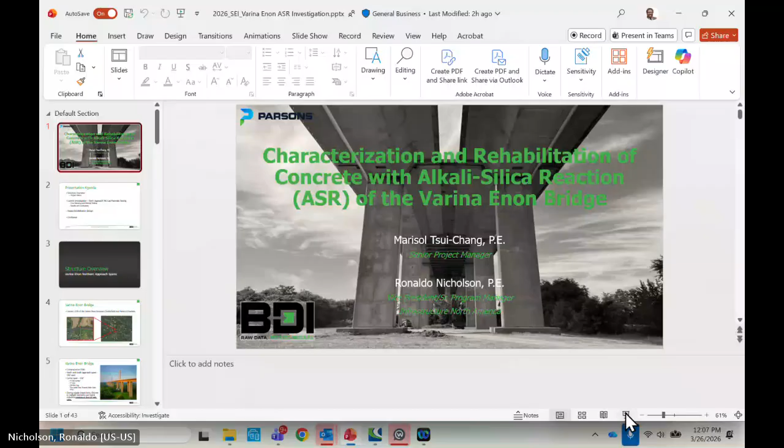Let me get the mic. Okay, I hear you. Now you can hear me. Yes. There we go. All right, I see it. Perfect. All right, floor is yours.

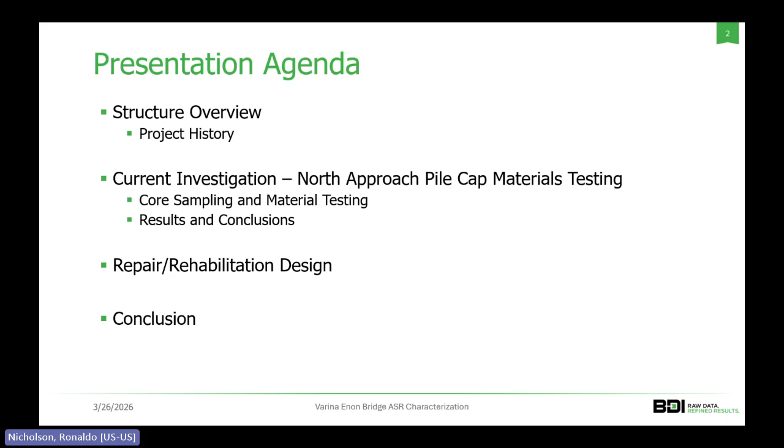Thank you. Well, thanks for the opportunity. Appreciate talking about this project. It's a very interesting, challenging project, and Marisol and I will hope to keep those interests going. We're talking about the Varina Enon Bridge, and our presentation today will focus on 3 areas and then give time for questions from you all and let you know the status update of where we are going forward.

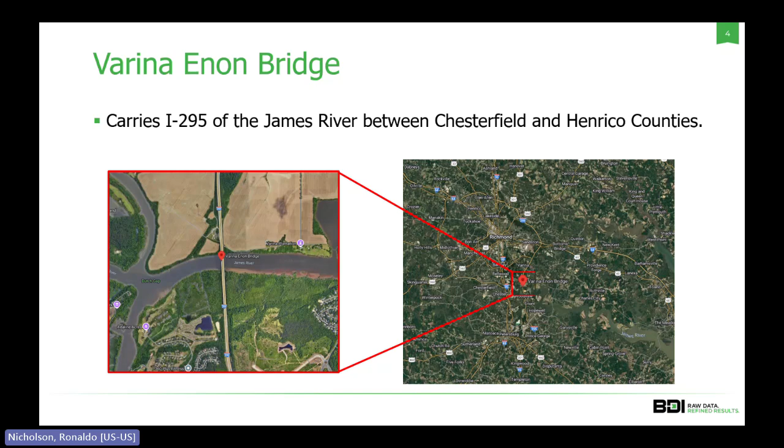Overview of the structure itself. It's Virginia's first and only cable-stayed bridge. It carries I-295 over the James River, right at the borderline of Chesterfield and Henrico County, which is a bypass, a circular of the city of Richmond. Originally completed in the early 1990s. It has a center main span of 630 feet with approach spans of 150 each. Post-tension box girders and piers with a cast-in-place pile cap.

That's where our real problem exists, is in the cast-in-place units of the structure, as they were found to have ASR contamination. Basically, through our regular biannual inspections, we're starting to notice distress in multiple units of the pile caps. And as it continued to deteriorate due to that ASR expansion, concern was then given to its ability to carry the loads. Aesthetically pleasing bridge if you ever been on it, but the problems lie down in both the exposed and buried pile caps, as you'll see as we get further on.

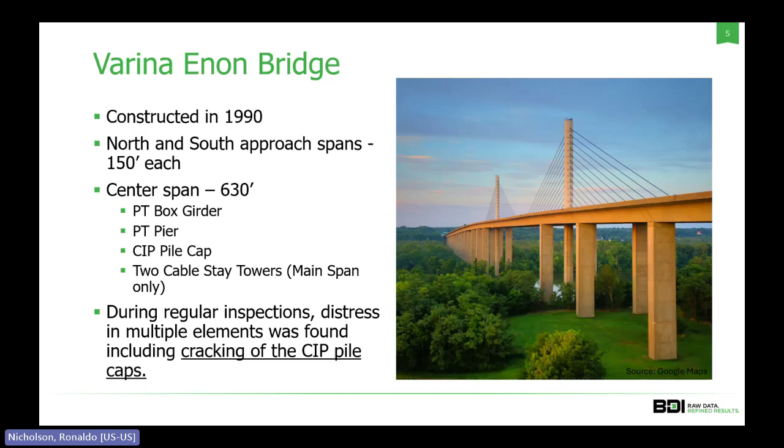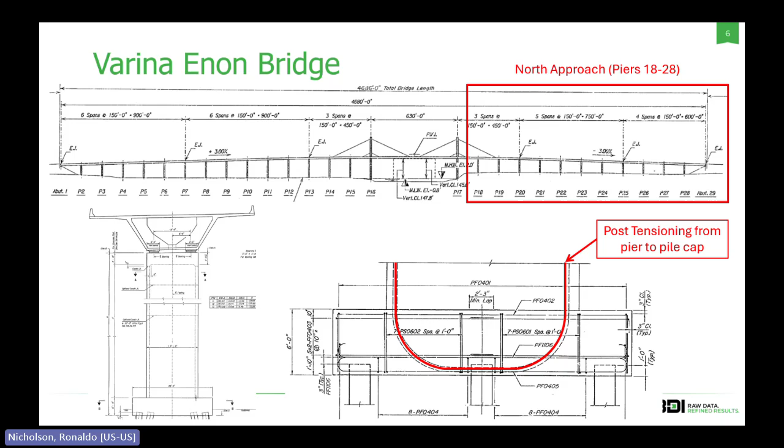Here is the profile and some of the representative piers of the structure. Note again that we had post-tensioning of the pile caps. Basically up over the James River. These are 2 dual bridges with some 27 pairs of piers. This particular presentation focuses on the northern approach, because through inspection, testing, we found out that those were mostly in the severe deteriorated conditions. We came along after a study conducted by WSP. Their study was in the 2018 timeframe. Ours was in latter years of, I'd say the mid years of 2023.

We basically advised VDOT, the owner of the bridge, that the footings were in a state of severe cracking, and the load carrying capacity was at risk. VDOT did an initial study to consider the replacing of the structure versus rehabilitation.

Just to step back, ASR, alkali-silica reaction, is normally a cancer of concrete. There's not a remedy thus far, despite research that has been conducted by the University of Texas at Austin, Federal Highways, and other owner agencies have just determined that mostly when it's there, you replace the concrete, you replace the components, you replace the structural elements that have the reaction. We did not have that benefit or luxury with the Varina Enon Bridge, being that it was the pile caps for the footings. The replacement means we replaced the bridge.

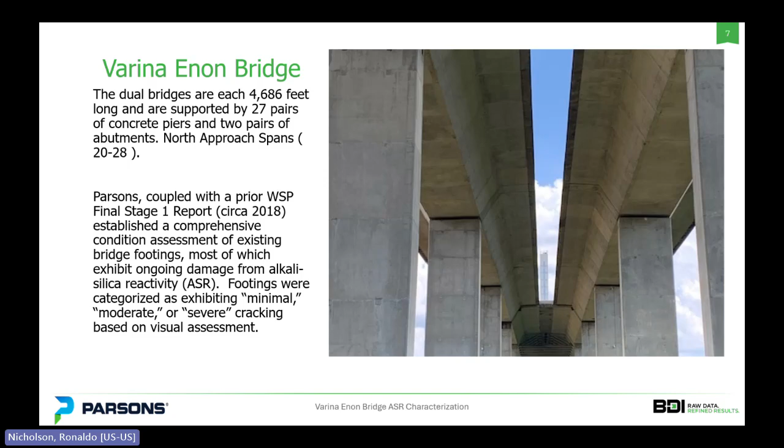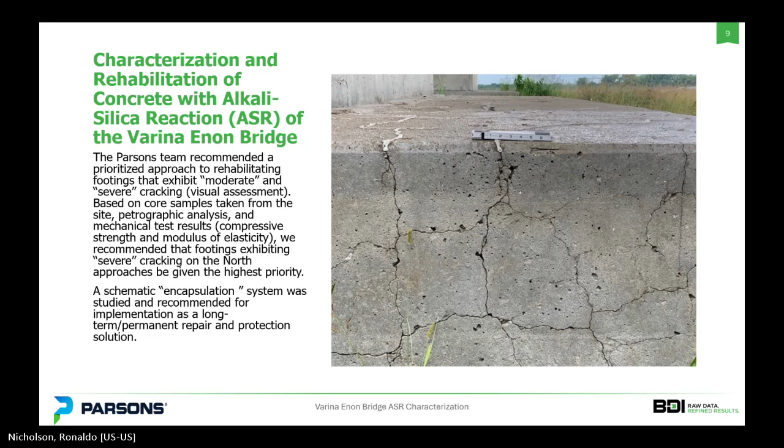Marisol, you want to jump in? Yep. Thank you, Nick. So now we'll go over some of the project history and some initial investigations. So like Nick said, the Parsons team recommended a prioritized approach, first to look at the moderate and severe cracked pile caps based on some of the core samples taken from the initial investigation, some petrography, material testing, that kind of stuff. They did recommend that at least the severely cracked pile caps in the north approach be given the highest priority, or then again, like the goal would be to extend the life by doing some sort of repair. And in this case, the schematic encapsulation system was studied and recommended for the implementation as a long-term solution.

So like Nick mentioned, during regular inspections, extensive map cracking of these pile caps, as you can see in the photo on the right, was observed. From that, some of the limited material testing from WSP and others in previous years included petrographic analysis, chloride testing, compressive, split tensile, modulus of elasticity, and then some residual ASR expansion testing.

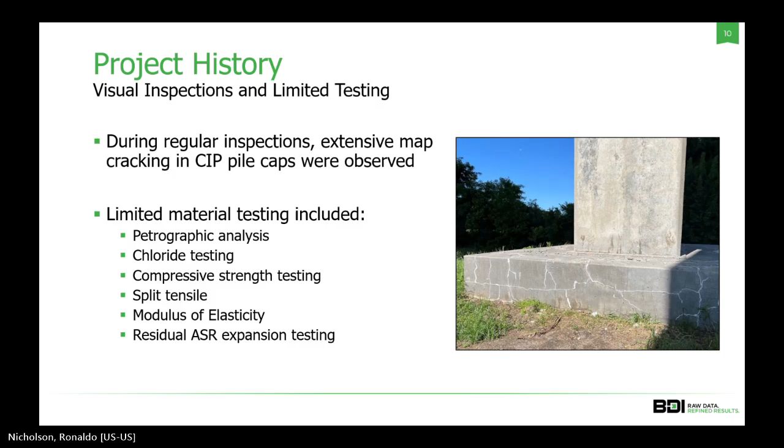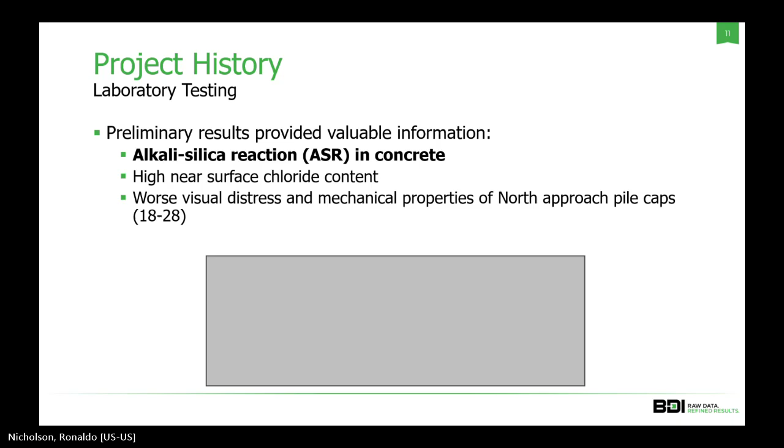Next slide, please. From these results, some of the valuable information obtained was that, in fact, they did have alkali-silica reaction in the concrete. They also had some high near-surface chloride contents, and in general, worse visual distress and mechanical properties of the north approach pile caps, which is why Parsons, in this case, recommended to start over there and perform sort of repair encapsulation. Next slide, please.

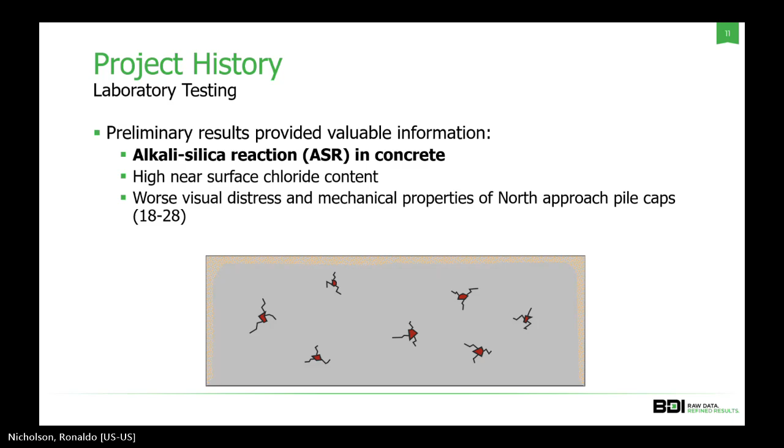So taking a step back, what is ASR? I think Nick started off really well by saying that it is considered the cancer of concrete. ASR in concrete is a chemical reaction between the alkalis in the cement paste and the reactive silica in the aggregates, in combination with moisture, that produces an expansive gel that can cause cracking and deterioration over time.

This expansive gel reaction generally starts within the aggregate and around it, cracking inside the aggregates themselves and then expanding outward. A lot of the time ASR can be manifested as map cracking, like the photo on the left. But if you take a core with pretty severe ASR, you can see cracking in and around the aggregates with a whitish material. That's one way to preliminarily deduce that ASR is occurring.

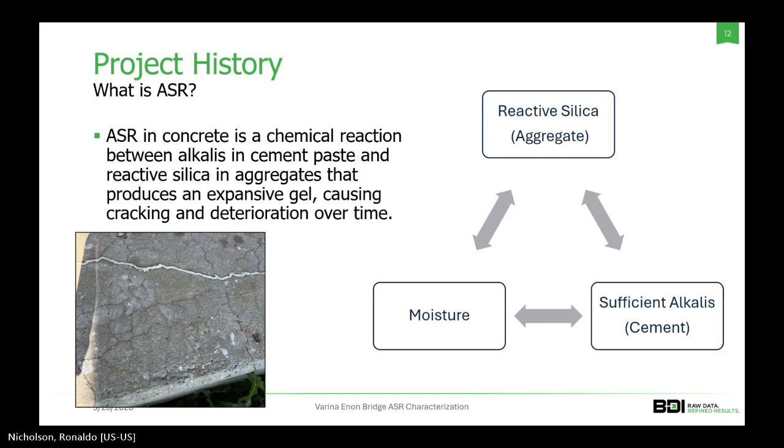But at the same time, you do need petrographic examination to confirm that it is in fact ASR. So from the preliminary investigation, the owner still needed to answer a lot of questions to allow for effective decision making and design of the repairs.

These questions were: why are the north approach piers in worse condition? What's the difference between the north and the south? How has the concrete already been impacted? Where are we in point of time in this cancer? What is the potential future expansion from ASR? What specific piers need to be prioritized? And what other deterioration mechanisms are present?

Because this is an extensive list, we're only really going to prioritize the potential future expansion for ASR for the current investigation, because that was one of the main questions that would inform the repair design. So we'll focus on that next.

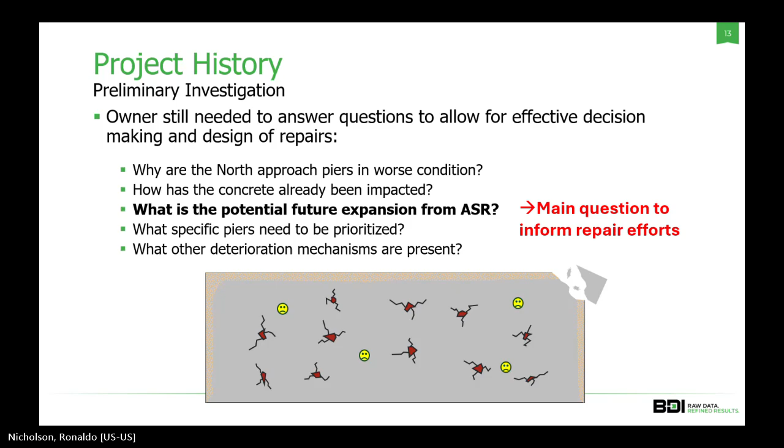Alright, so for the current investigation, for testing and project goals, we wanted to determine key information to confirm design assumptions and inform an effective repair design that Nick will go over after this section. Key information included in-situ mechanical properties, making sure the assumptions on these mechanical properties were correct, and if not, course correct. This included compressive strength, split tensile strength, stiffness damage testing, and modulus of elasticity.

We also wanted to look at the remaining ASR expansion based on advanced models using the damage rate index, ASR expansion testing, and residual alkalis. These advanced models were performed by Dr. Leandro Sanchez from University of Ottawa, who was one of the subject matter experts for the project.

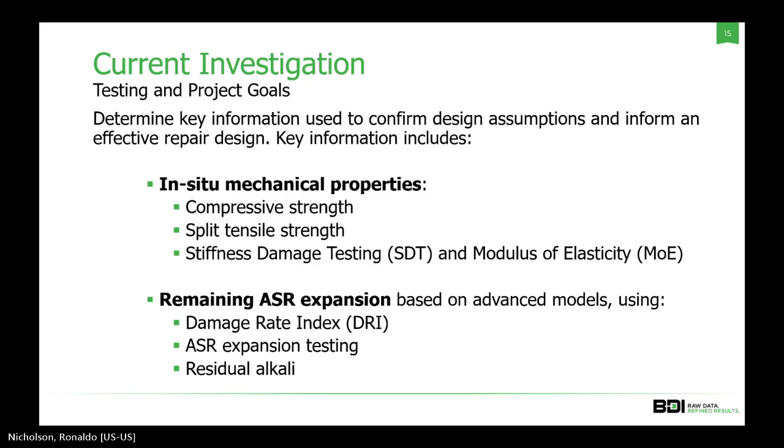So the testing performed - again, we did a lot of testing for this investigation of the north approach. We did non-destructive evaluation, high-resolution imaging, and ultrasonic surface waves. We also did petrographic testing to look for types of aggregates and constituents, hardened air testing, secondary deposit or DEF, and ASR damage rating index, or DRI.

For the mechanical properties, we did compressive strength, split tensile testing with modulus of elasticity. For the ASR testing, we did residual alkali expansion testing and water-soluble alkalis. And for chloride testing, we also did acid-soluble and water-soluble. Again, we're not going to go over all of these because it's a very in-depth investigation - we'll only go over primarily the ones that are bold on the screen.

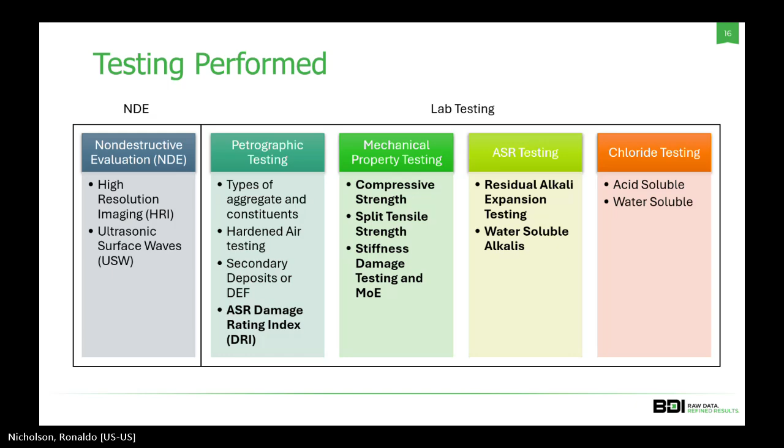So for the concrete sampling and testing, we sampled in accordance with ACI 214.4, and we collected about 92 cores across the entire north approach, where one core could be utilized for multiple tests since these were going to be pretty large cores. We performed about 625 tests total, and we decided on collecting the cores in the most critical concrete sections, for both vertical and horizontal cores. I'll explain a little bit of what that means in the next slide.

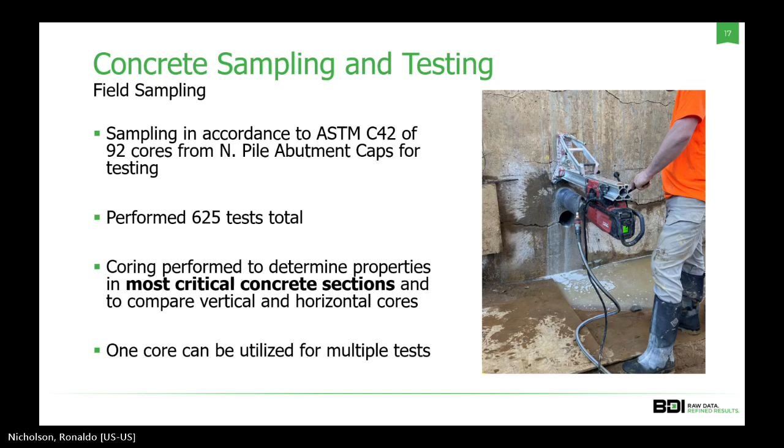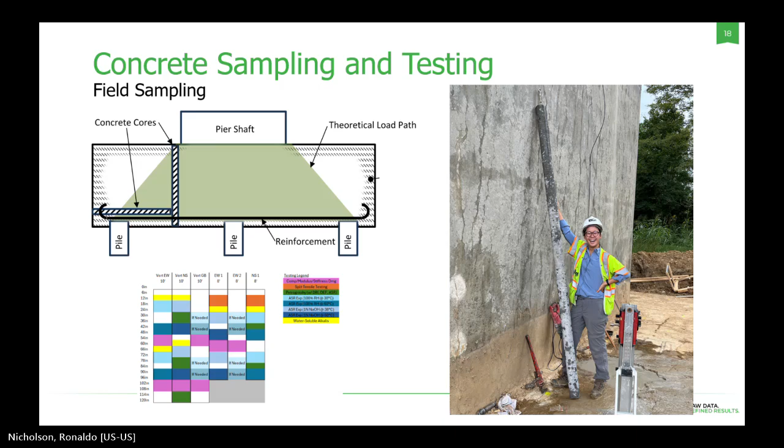For some of the pile caps, since the height of these pile caps were up to 10 feet, some of these cores were pretty long and weighed over 200 pounds. So this was quite an effort to be able to collect these cores. Next slide, please.

So this is the entire lab testing matrix for all of the pile caps with all the different tests that we performed. As you can see here, it's a pretty extensive program, which for an effort like this, it does take a village to be able to perform such studies.

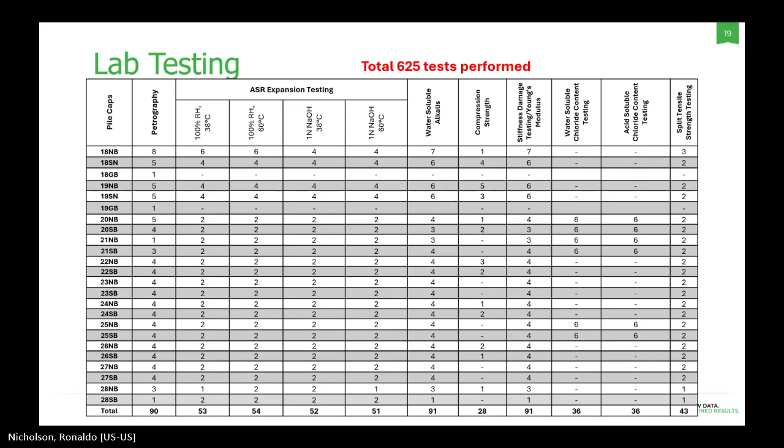We did this investigation in coordination with Tony Manzella and Mike Mazzulla from Pennoni for the coring and a portion of the material testing, and Carla Sanshore from WJE for the petrography. It does take a village to pull something like this together, for sure.

For the mechanical properties, we did compressive strength based on ASTM C39, split tensile based on ASTM C496, and modulus of elasticity and stiffness damage testing, where naturally the internal microcracking from these types of cracking and expansion can result in worsening mechanical properties.

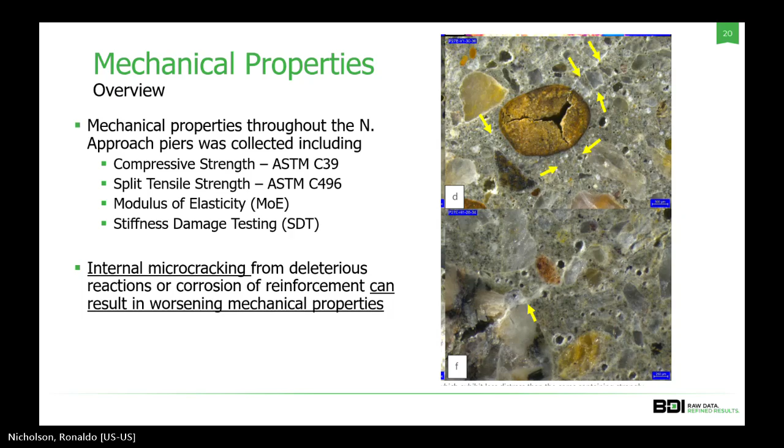So we wanted to make sure that we were testing for those for the repair design. Average compressive strengths, the tensile, modulus of elasticity, and stiffness damage testing were reported, where the values in parentheses, in bold, are some of the limits based on the design values for the original designs.

As you can see, strength was pretty okay, with a handful of lower split tensile locations, but in general fairly low modulus of elasticity. I'm sure that Nick could probably tell you that all of these were used to make sure that the design was appropriate for these mechanical properties of the concrete.

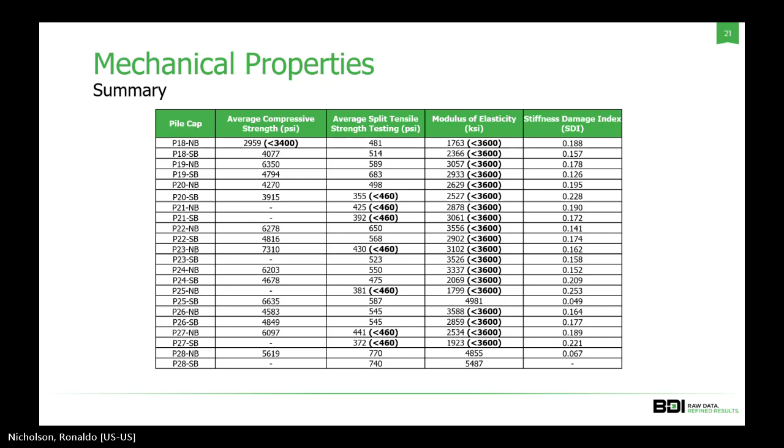For the petrographic testing, the petrography was performed following ASTM C856, where we were looking at the composition, aggregate types, water to cement ratio, SCMs, any presence of deleterious reactions, cracking, and overall condition, as well as hardened air void testing per ASTM C457 and the ASR damage rating index. We'll go over a little bit of what that means in the next few slides.

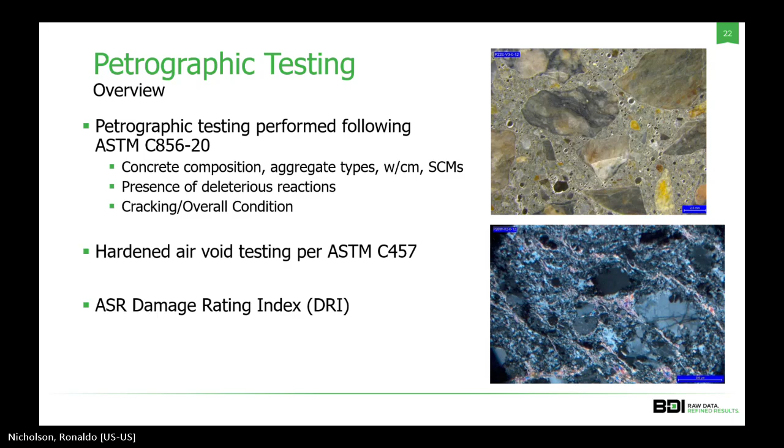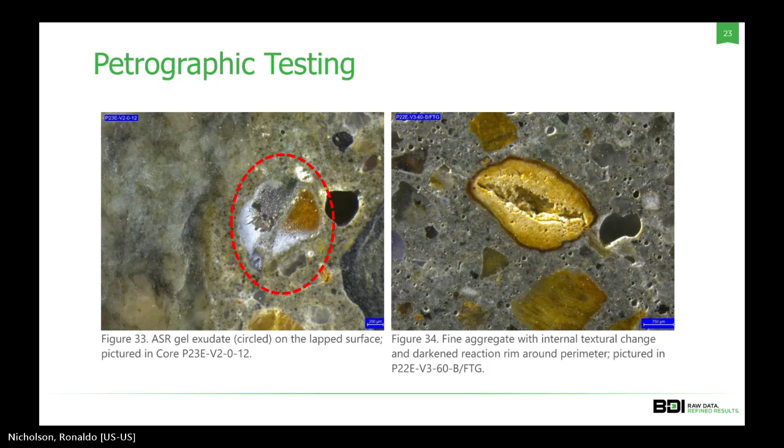So these are some of the nice photographs that we can get from petrography. Again, the best way to fully determine that a concrete has ASR is through petrographic tests. You can see here some examples of how the cracking starts within the aggregate, around the aggregate, and can create severe damage and cracking to the entire concrete.

In general, for the petrographic testing, it was determined that 4 different concrete mixes were used across the north approach, where some piers have fly ash. We'll see here in a minute how fly ash has now been known to mitigate ASR. So maybe at the time it was somewhat of a mistake to have fly ash in some of these piers, but it's being good in the long term. Fly ash and SCMs are generally pretty good at mitigating ASR, as we now know.

There was likely ASR-induced deterioration, which was also characterized by this damage rating index. Also observed were secondary ettringite present, but not necessarily conclusive of the presence of delayed ettringite formation, which is another whole can of worms that could contribute to severe expansion of the concrete.

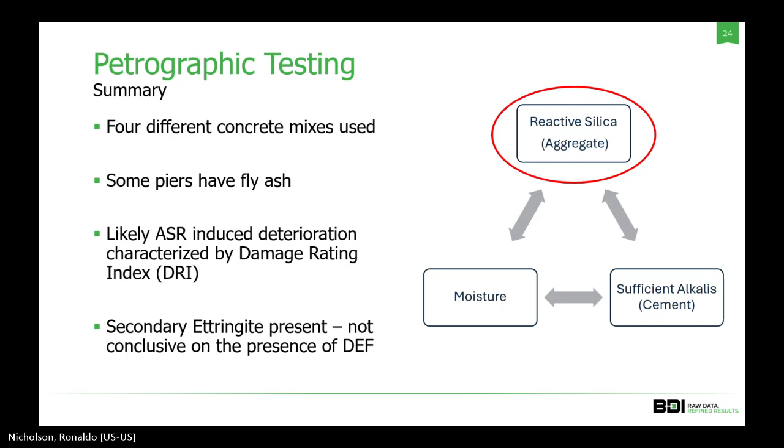In order to further characterize the ASR, we also performed a calculation of a DRI value. DRI is a unitless scale which allows an approximation of the extent of damage within a concrete sample.

It's calculated by counting the number of occurrences of features in a 1 centimeter grid, then normalizing it to determine a number per 100 square centimeters, multiplied by a weight factor depending on the type of feature. This is summed up to reach a final DRI value. It's a process to further characterize ASR based on specific features such as cracking in and around the aggregate, that kind of stuff, of a concrete.

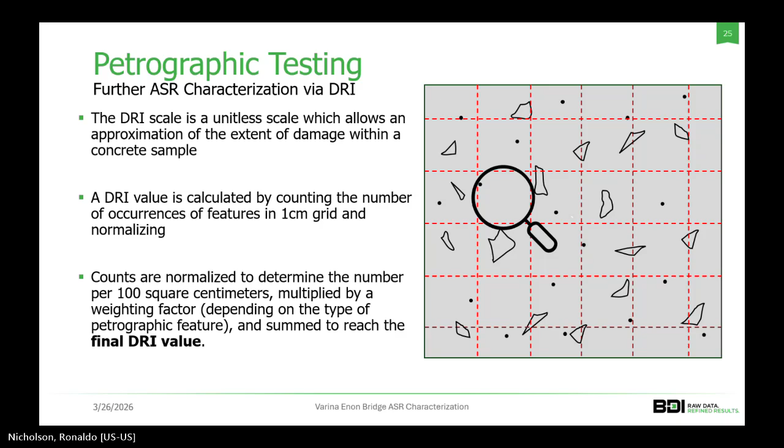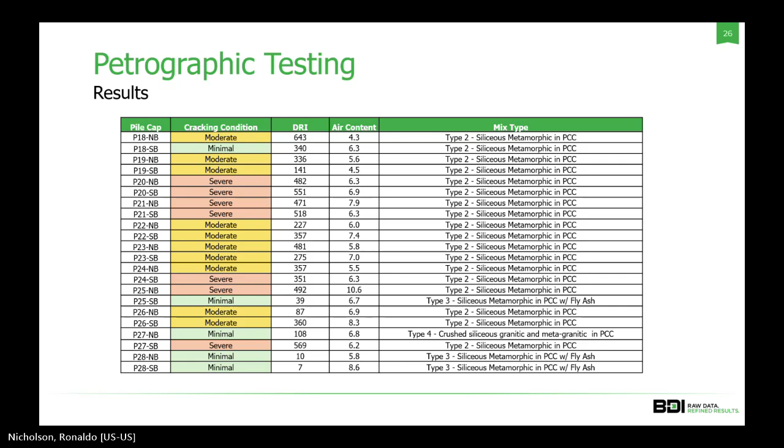We also performed residual water-soluble alkali content testing. Again, it's another one of the ingredients for ASR. Understanding how much alkali was left in the system helped the advanced models for remaining ASR expansion, where the primary component, again, is the alkalis in the cement paste, which are sodium and potassium hydroxide.

The alkalis were tested using hot water extraction and evaluated on a Na2O equivalent basis, where the resulting measurement only provided water-soluble alkalis, which can be as little as 40% of the total alkali content of concrete. Again, it's one of the limitations of the test.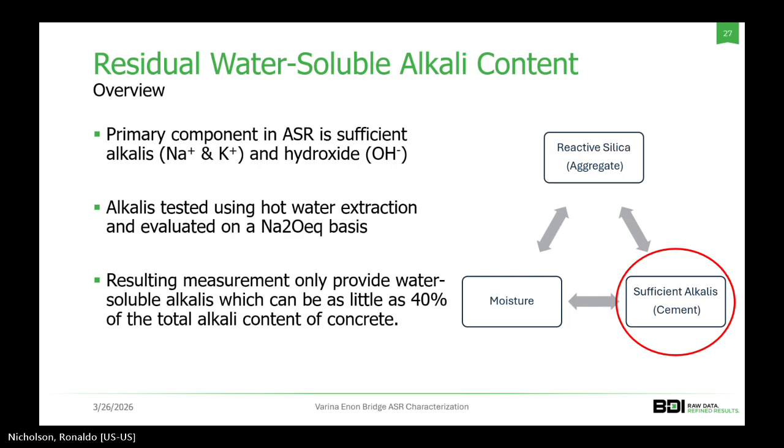Result of the water-soluble alkali content, again, pretty straightforward. This is one of the parameters that Dr. Sanchez used in his model.

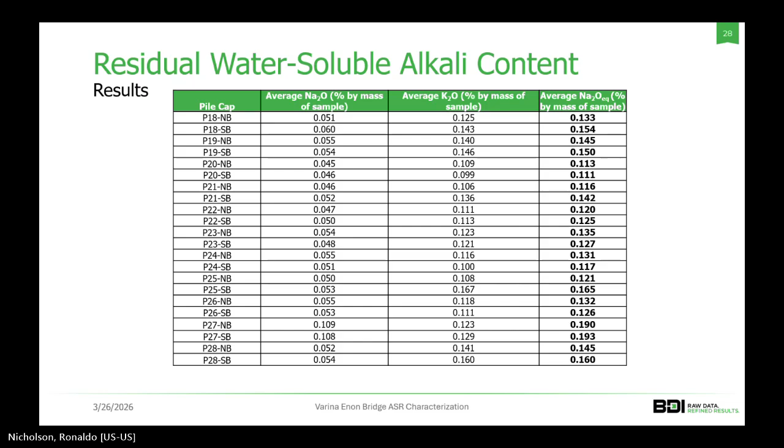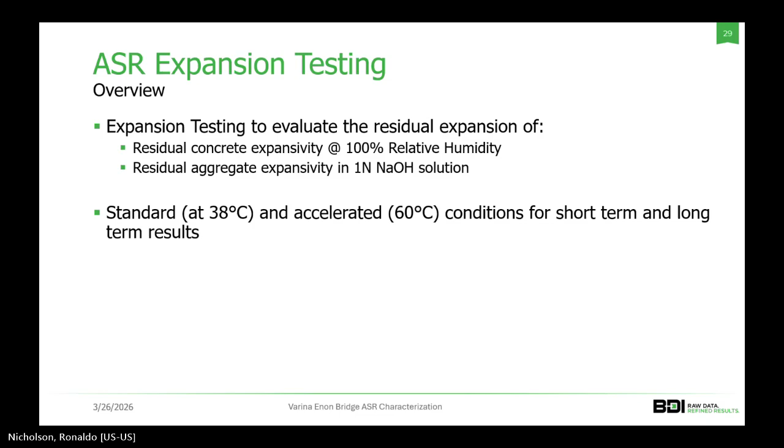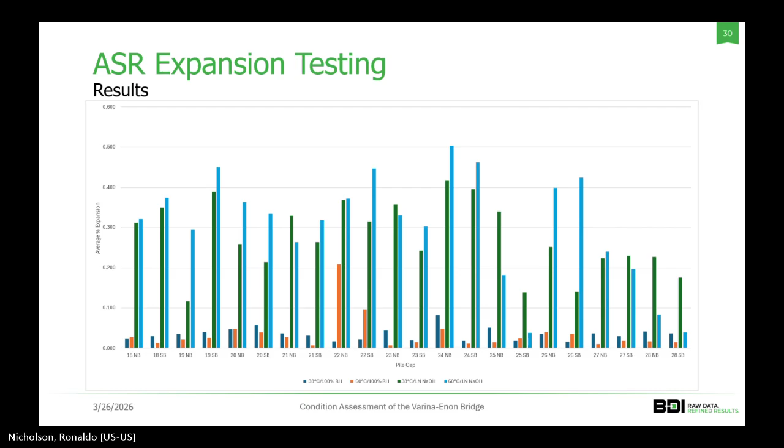As you can see, the 60 degrees C and sodium hydroxide solution, in general, resulted in extensive average percent expansion. I believe these results were primarily used qualitatively to evaluate the severity of the ASR in these concretes. But I do believe Dr. Sanchez primarily used the 38 degrees C with sodium hydroxide solution for his models.

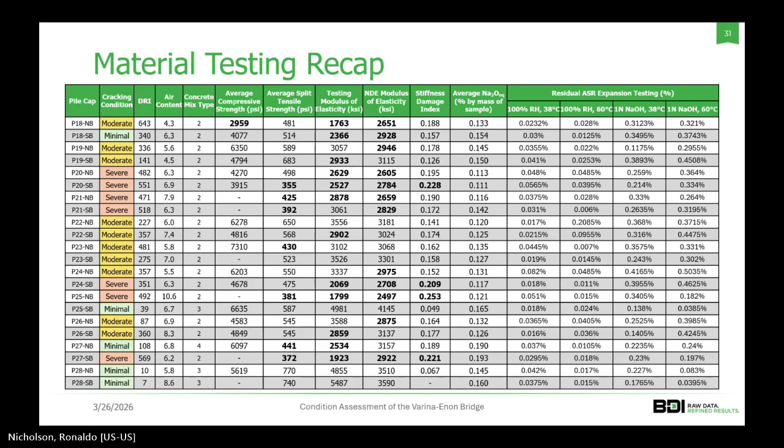Alright, so to recap, this was a fairly extensive material testing investigation of all the different pile caps of the north approach, where all of this information was taken into account to provide information for both the model for remaining expansion, ASR expansion, as well as to verify some of these mechanical properties for the repair encapsulation for Nick and his team.

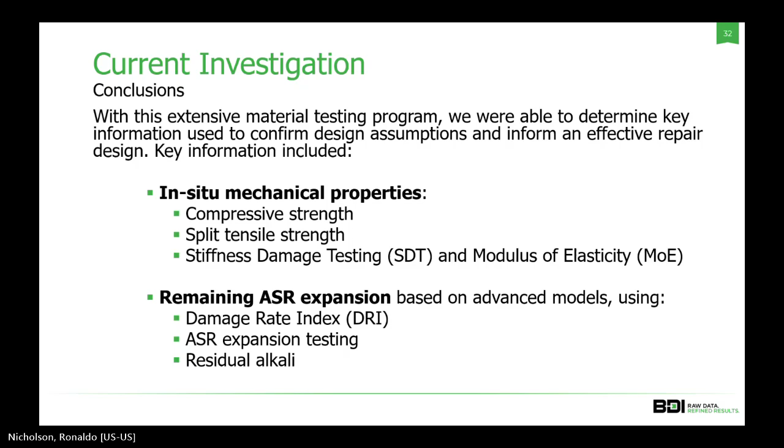And with that, I believe we'll go over the encapsulation now, Nick. Further repairs and rehabilitation based on the findings.

We had little guidance, basically from Federal Highways, we had this 2010 report. It basically concluded, as previously stated, you must have alkalis and silica within the concrete and aggregate, but you also must have moisture in order to sustain the reactions.

Our initial thoughts were that the reactive moisture was coming from basically ambient sources, down within a high water table, and there are many ways for moisture to continue to enter the footing concrete substrate. As the cracking advances, there's even more opportunity for moisture to continue.

But as we went through the research, both with Dr. Sanchez and Dr. Folliard out of University of Texas, their research showed that the moisture contained in the initial hydration of the concrete was sufficient to sustain ASR reactions throughout the life cycle of the concrete. This turned our design philosophy away from preventing moisture to some way of preventing the expansion of ASR.

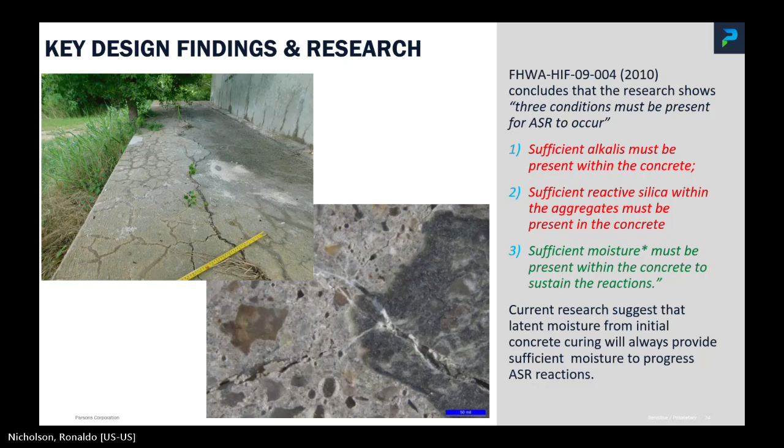Other key findings from the literature and what has been done: initially, we had hoped that lithium would be a mitigation. We quickly found that this did little to prevent the further expansion. We tried breathable sealants that would basically prevent moisture from coming in but allow the excess to escape. We tried this, and again through this testing that BDI did, we saw that the expansion was continuing to occur.

So based upon the previous study, we turned to an encasement or encapsulation method, where basically we would restrain such expansion due to ASR by confining the core load path within the footing. This is an example that was done in South Africa on a similar footing, where you see both the mat and the post-tension footing as an end result.

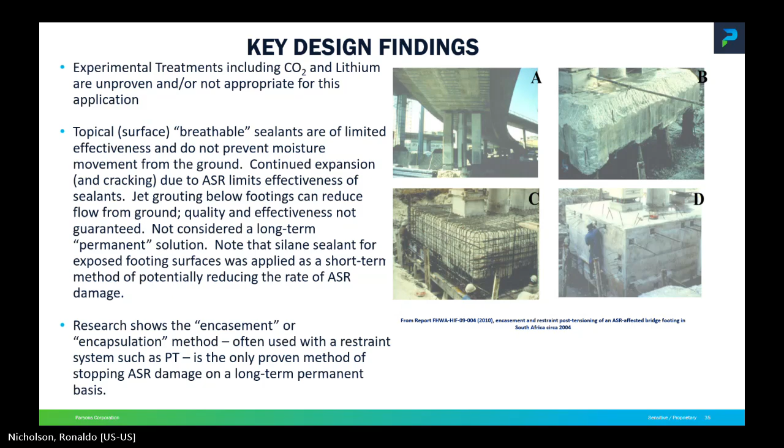So our conceptual concept was to do something similar. First, we had to do a detailed inspection to determine the amount of damaged concrete. That inspection would require that we expose the entire footing. Some are currently exposed, some would require us to excavate around the entire footing.

Because the bottom of the footing had never been inspected, or there was no evidence except through our coring of the level of impact on that concrete, we needed to have access to the bottom of the footing as well. The footing is supported on piles, so our conceptual and final design included excavating underneath the footing so that it can be inspected and damaged concrete could be removed.

Based on the test results as provided, we then took those major mechanical properties of the existing footing and put those into models that allowed us to have some predictive fashion of what design values and what we need to do to actually encapsulate, both with the concrete as well as with the post-tensioning.

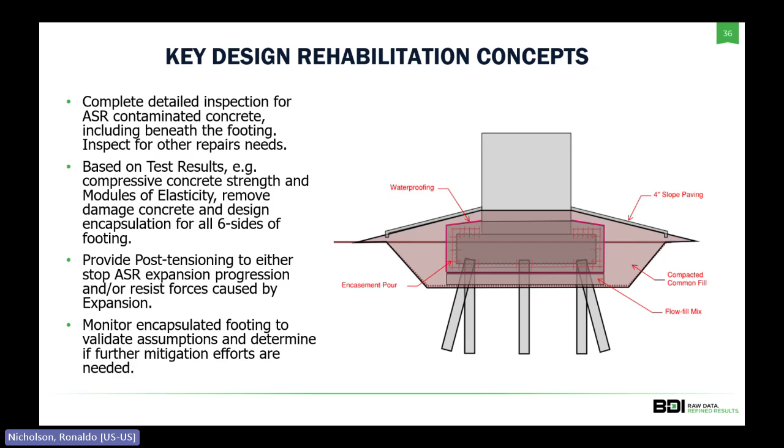So our northern approach was our first effort for mitigation. Some 18 actual footings, again, some exposed, but mostly not exposed, buried beneath the ground.

We decided to encapsulate these footings with high performance fiber reinforced concrete and then post tension after the encapsulation had cured.

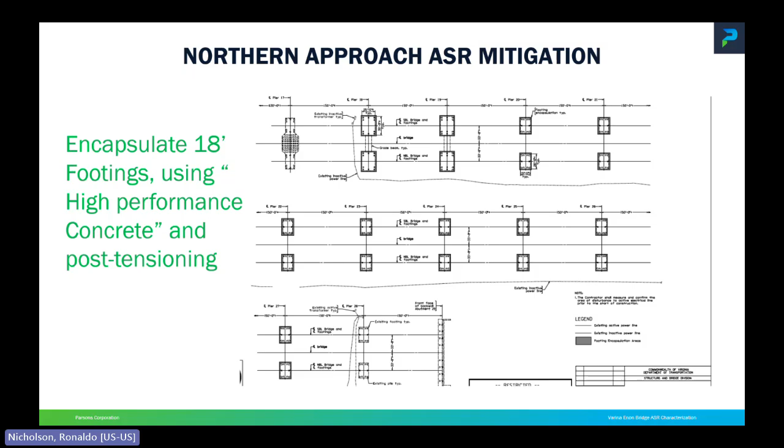The sequence for the ASR rehab was, after there was the excavation, you see the extensive excavation.

We would then inspect the entire footing with an NBIS inspector, defining the deteriorated or damaged concrete for removal.

That removal consisted of basically either hydro or mechanical means to remove some 5 inches of concrete around the entire footing.

Based on just construction methods, we've also looked at and seen if any of the precast piles were damaged. We would do substructure repairs in accordance with VDOT standards on them as well.

In the anchorage zones, those zones which maintain the strut and tie efforts, we wanted to remove all the contaminated concrete. So we looked at methods of sequential and phased removal of that concrete while we maintain the load path and load bearing capacity of each footing as we remove and replace the concrete with high performance, fiber reinforced concrete.

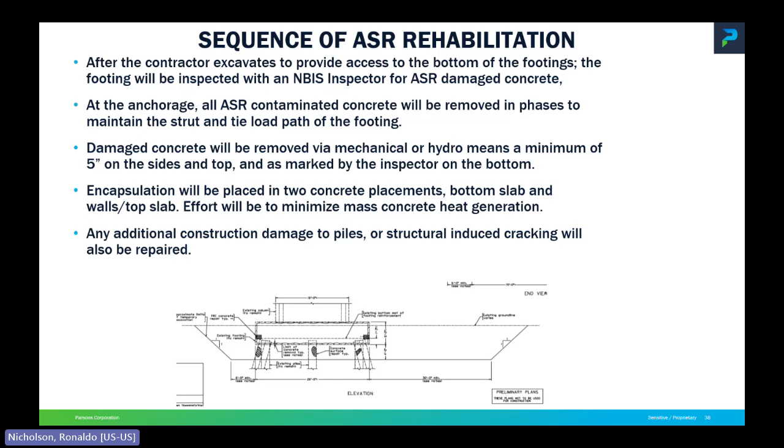So let me go through some of the major challenges. Again, from the data that we obtained from the testing, we did a bunch of computer models using Larsa for first the main span, as well as a soil spring model for the entire structure.

We then broke down and did another Larsa model for the northern approaches to basically be able to predict the in-service behavior due to the damaged concrete and the structural properties of that concrete.

We then applied LUSAS for a local finite element model as we started to determine what type of encapsulation and reinforcement is needed. And again, to maintain the strut and tie mechanism of the footing as we replace the anchorage zone concrete, we did that analysis as well.

Because of the additional loading of the encapsulation, we also redid our pile cap analysis to make sure that we didn't overstress the piles. And of course, we had to make it exciting because that additional load did take the piles to their limits.

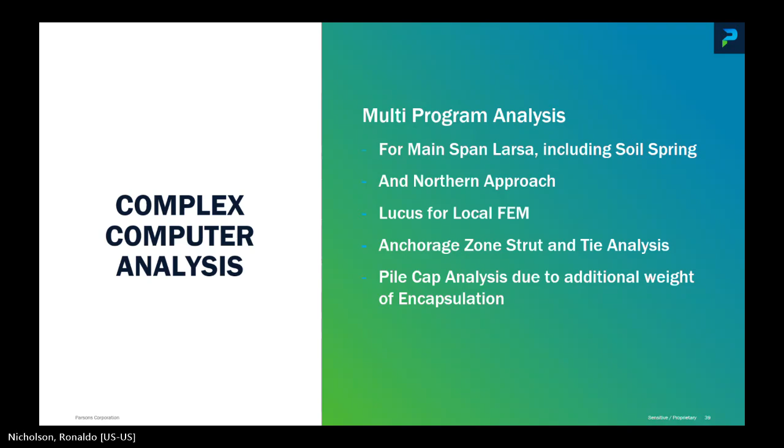So we went back, looked at the actual construction piles, loadings, to make sure that we did have the capacity once we did put on this additional weight of the encapsulation.

The other challenge was to develop a mix that can meet all the needs. Working with the Virginia Transportation Research Council, we developed 3 separate fiber reinforced ultra high performance concrete and high performance concrete mixes, which were tested in the VTRC labs, where we were looking for different properties to give a go for that mix.

For the anchorage zone, we depended on our splitting tensile strength of the control mix to make sure it was feasible. For the wall or encapsulation, we're looking more at permeability, as well as flowability at the slab mixes. All of these were in a controlled lab.

We worked with our admixture vendors as well as suppliers, which was another challenge, because in this area of the James River, Varina Enon Bridge, there were not a lot of suppliers that could, one, meet the capabilities of these mix designs, but two, have the production capacity to provide ready mix volumes such that we would not develop cold joints in our wall or slab footings.

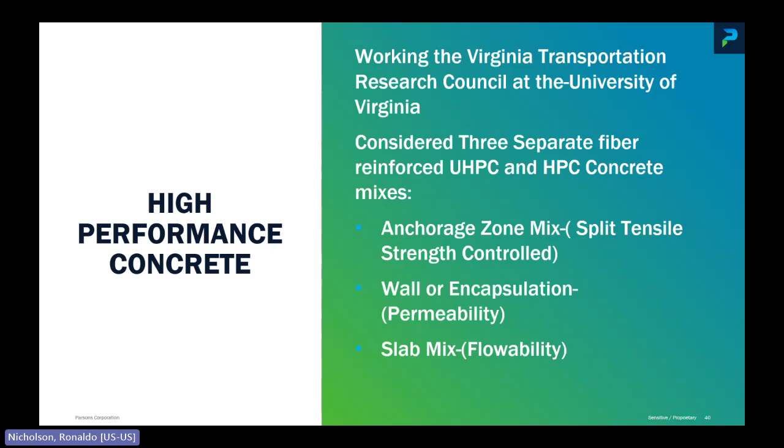And finally, it was the post-tensioning. We decided to go with PT bars versus strand tendons for providing the post-tensioning. We felt this was more constructible and more readily monitored than going with tendons or strands over the long run.

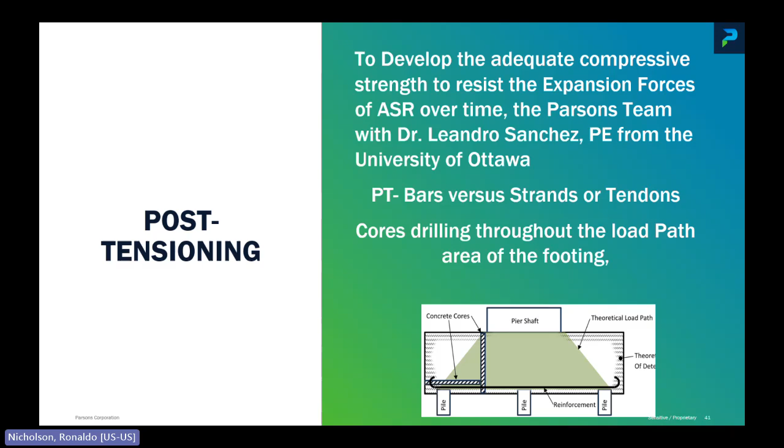Those cores that the post-tension bars would go through would be another challenge, given the huge dimensions of the footings. As previously shown, the cores can be very extensive, and they had to basically be able to support the straight bars once they were completed.

Again, it was our conclusion that the chemical reaction and mechanism would always be there for ASR, but through research, if we can apply some 5 megapascals of counteracting pressure, we can stop the expansion progression. Dr. Sanchez basically developed his models based on that, and that went into our post-tensioning strengths and needs in the final design.

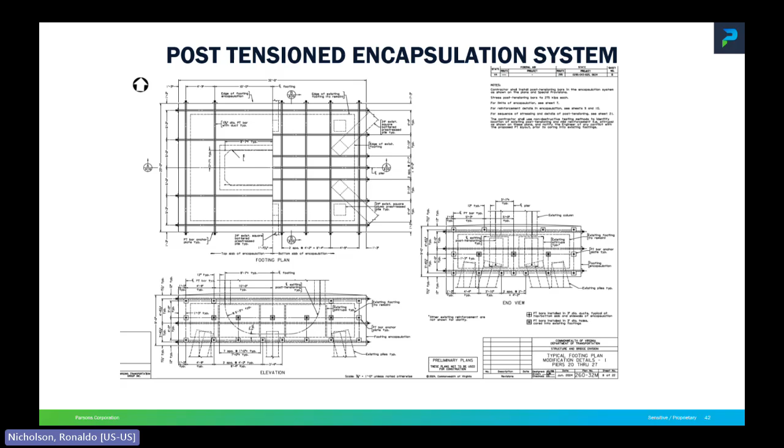Currently, the project has been advertised. We had 7 bidders, and the low bidder, Freyssinet, was able to be within 2% of the engineer's estimate. So we were very pleased with those results.

The contract has now been awarded. We've been through the review and shop drawing phase, and we hope to start excavation and production probably within the next 30 days. So that's where we are with the project. Marisol and I would be happy to take questions at this time.